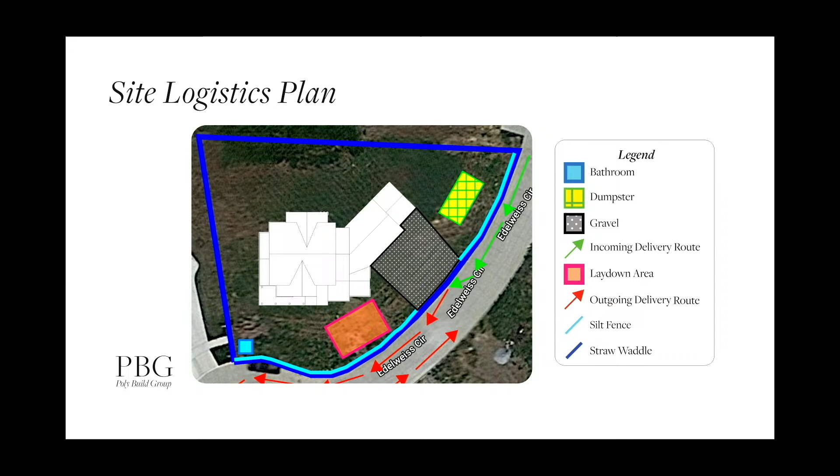Next, I'd like to pass it off to Madison to talk about schedule. Thanks, Brendan. So for this project, we calculated a total duration of 173 working days while keeping in mind holidays and potential weather delays. We built this schedule keeping in mind that the best time to build in Tiffin is after March, when the ground is thawed, so we can start site work and excavation right away.

To talk a little about permitting, Tiffin takes about an average of 5 to 10 days to secure a building permit. Therefore, we felt that 9 was appropriate given the planning and accuracy that went into this home. So our permitting will be complete a month and a half before we break ground, kicking off pre-construction.

We paid special attention to long lead items such as cabinets, lumber, appliances, doors, and windows. We want to do this to make sure that our crews have material on site right when they need it so that they can start on schedule.

Our mobilization kicks off on April 3rd of 2023. Our home will be completely dried in by the time winter rolls around, making sure our interiors are protected. Our rough-in will be done on July 28th of 2023, roughly 4 months after the start of our project. Both our interiors and exteriors will be done by the beginning of November, and following that, final completion on November 29th of 2023. I'm going to pass it off to Leo to talk about the estimate.

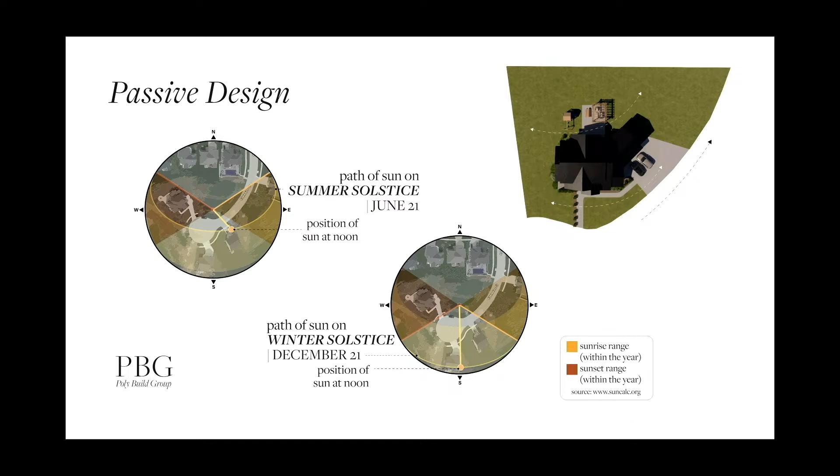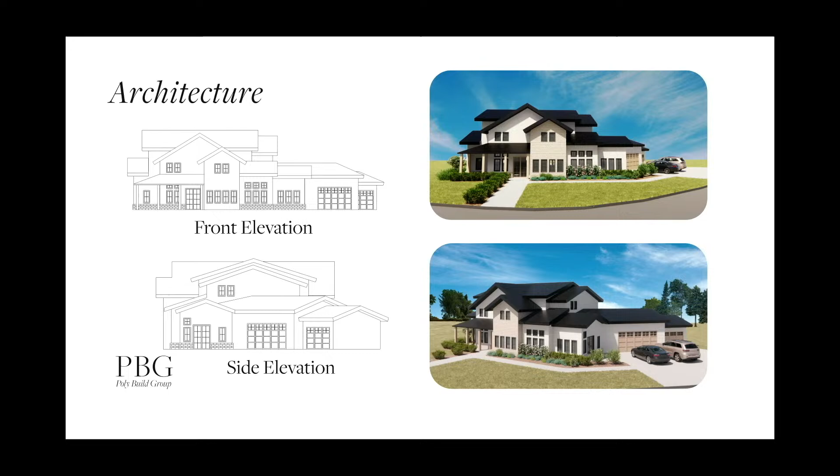Onto our elevation. The front elevation shows the south-facing window, and the side elevation shows the massing orientation I mentioned previously. To the floor plan, the main floor has 2 bedrooms and 1 full bathroom.

Entering in from the front porch, you're greeted into the living room that has double ceiling height before going into the open concept full kitchen. Opposite the kitchen is a flexible dining area and enclosed office space, a sunroom, a laundry room, and a 3-car garage.

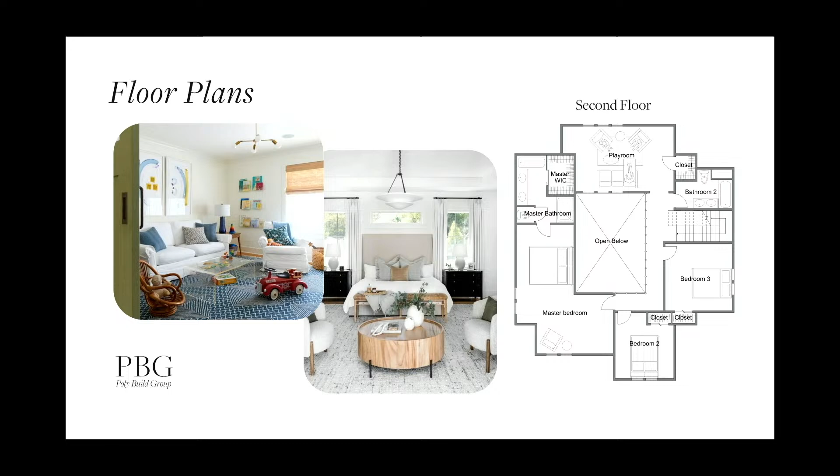Heading up to the second floor, you're greeted into the interior balcony space before going into the playroom. This floor has 3 bedrooms and 2 baths with a master ensuite and a walk-in closet.

Heading down to the basement level, you're greeted into the family room that has an egress window and another full bathroom. This floor has a flexible gym area as well. For more development and growth in the house, there's an unfinished storage space. This concludes the housing tour.

I'm going to pass it on to Russ for the finance overview.

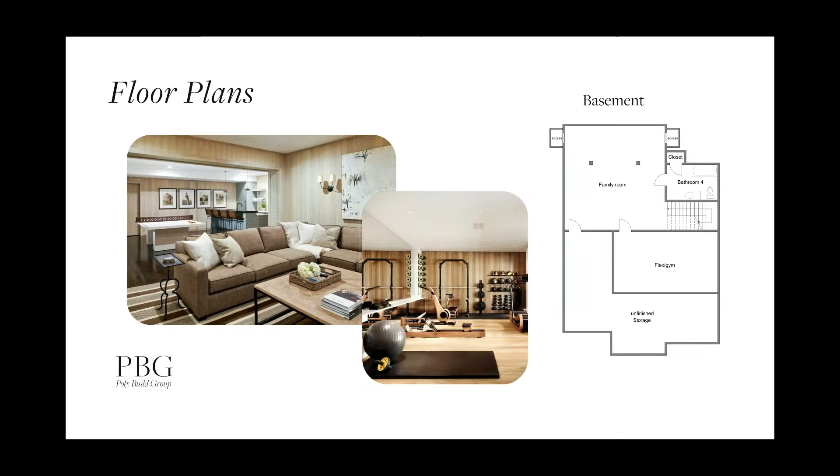Going into our acquisitions and construction costs, we have a lot acquisition of $99,900 and our soft costs, overhead, and hard costs totaling $507,000. Now going into our finance and closing costs, we talked to a few lenders in the area and found 7.5% to be a fair interest rate for this project.

Along with our interest expense of $21,000, we had an endorsement fee, escrow fee, appraisal fee, and loan fee. Going into our finance draw schedule, we started drawing money for this project in February, and this ended in November. Throughout each month, we paid interest on each expense that we had drawn for, and this was paid off at the date of sale.

Going into our sales and marketing costs, we used Redfin as our seller's agent, which gave us a 1.5% commission fee, and we used a buyer's agent commission fee of 2%, which was negotiated down due to current slow market trends and high interest rates.

Going into our sensitivity analysis, I would like to highlight 4 different segments that we kept our eyes on throughout the project, starting off with the sale date adjustment. As we hold on to the project for 1, 2, or 3 months after project completion, this will only affect our profit margin by 0.5% per month.

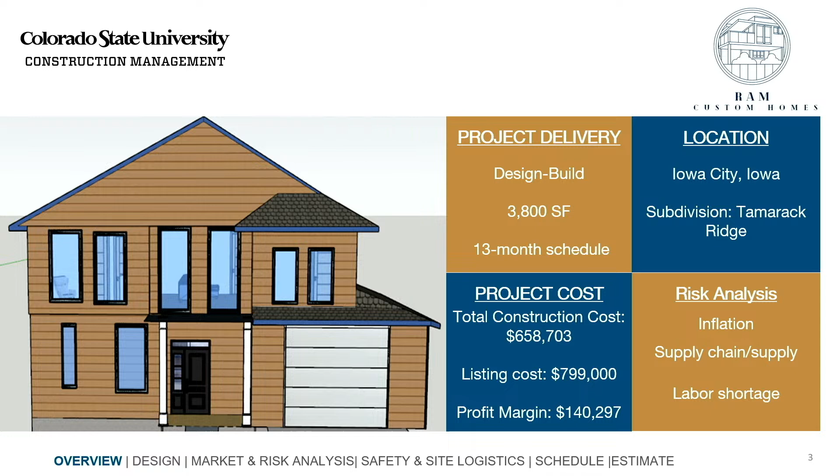We wanted to start with the design since it is a custom home. This is one of the biggest parts of our home. We have indoor-outdoor living in this house, with a bunch of huge windows. We picked a lot that backs up to an open space, so there's a big open space behind the house. You'll never have a neighbor, so you want to be able to have a good view.

We have a 3-panel sliding patio door that accesses the closed-in patio. It's a very modern design, built for growth. If you go in through the front door, you have a full bathroom on the first level as well as an office, and the rest is open space, so you can be with the family or go in the office.

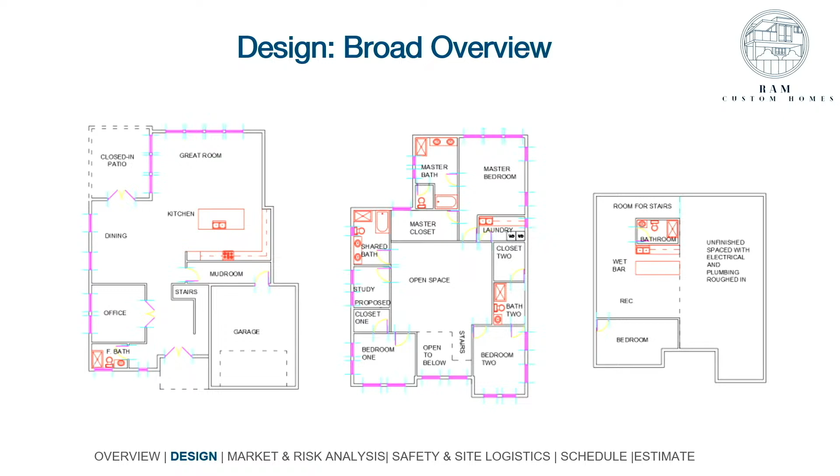If you go upstairs, you've got 3 bedrooms, 3 baths, as well as an additional office upstairs. With COVID being a thing, a lot more people are working from home. This allows 2 different people to be working at home at the same time without interrupting each other.

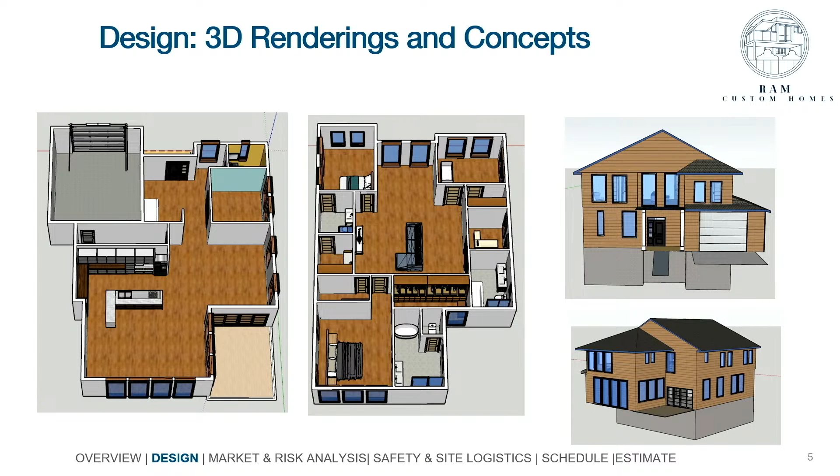As far as sustainability goes, we've got smart features throughout the whole house, smart lights and a smart thermostat, so you can control it while not being home. We also replaced the traditional grass lawn with a clover lawn. It's a lot easier upkeep and better for the environment, and it uses a lot less water too.

Right now we are looking at a seller's market, meaning homes are selling fast and increasing in value. As for competition for our house, most homes selling in Tamarack Ridge and comparable neighborhoods sell from $400,000 to $800,000, while higher value homes sell for a bit more. Our price is around $800,000, giving us availability to sell to a younger market and the ability to provide more custom homes.

We identified our target market as young professionals with high earning who want to expand their family. This population displays the highest amount of desire and ability to become homeowners. Our unique design and suburb location reflects the macro trends that are increasing market values, and the sustainable and unique designs are attracting homeowners from our target market.

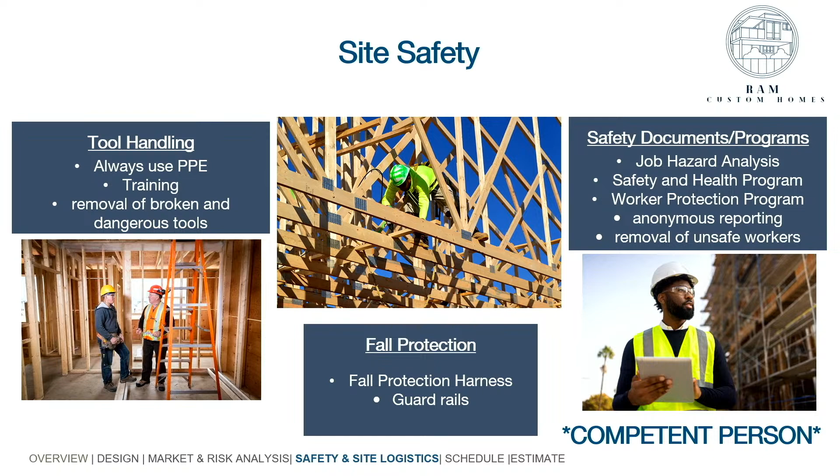One of the biggest risks when it comes to construction is safety. Here at Ram Custom Homes, we want to make our employees' and other workers' safety a priority always. Today we want to emphasize 3 of the main hazard preventions: tool handling, fall protection, and safety documents and programs. We emphasize these because they will be used most of the time during our project. We always want to have a competent person on site to make sure that the project and tasks are being done in a safe and correct manner.

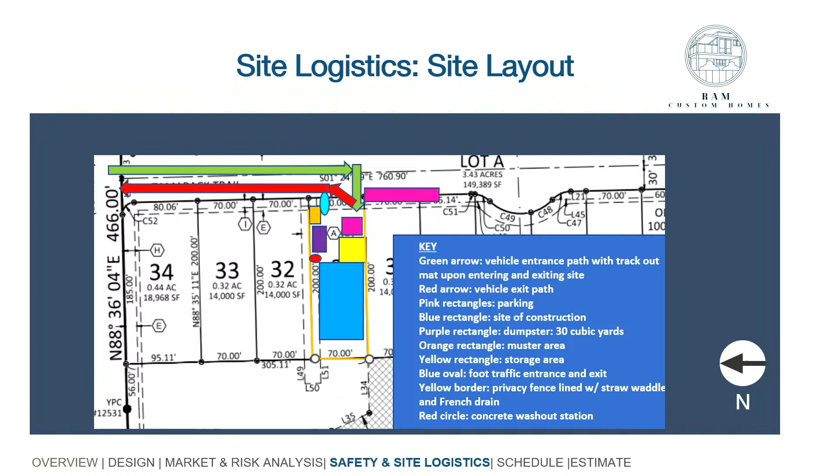With safety in mind, it helps us plan our site logistics. Here we have our road where our entrance and exit would always be. Because of this, we have easy access parking, along with easy access for delivery trucks to our storage area. The storage area will be easy access as well for our construction site, which is this big blue rectangle. We want to point out our linear yellow square and red circle because this will help with our stormwater prevention plan.

The stormwater prevention plan includes a fence with a privacy screen, along with straw wattle, and a French drain. This would help prevent contamination, along with the water management easement that's in the backyard, and a concrete washout for the phase when we have concrete as well.

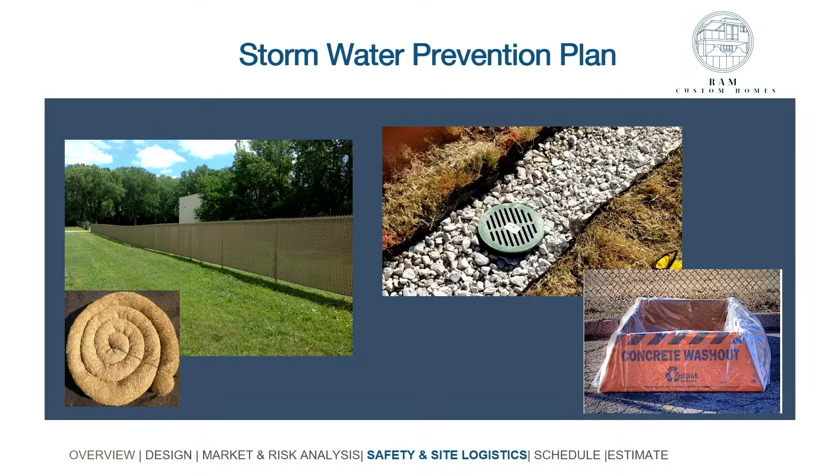As you might have noticed, this seems like a little bit of a longer time frame, and a lot of that is because we're a design-build company. We do have our 3D renderings, but we have not finished our documents, and the big part of that is because this is a custom home. We really want our customer to have their say on their finishes. We want them to feel like this is their home, so the sooner we can get them involved, the better.

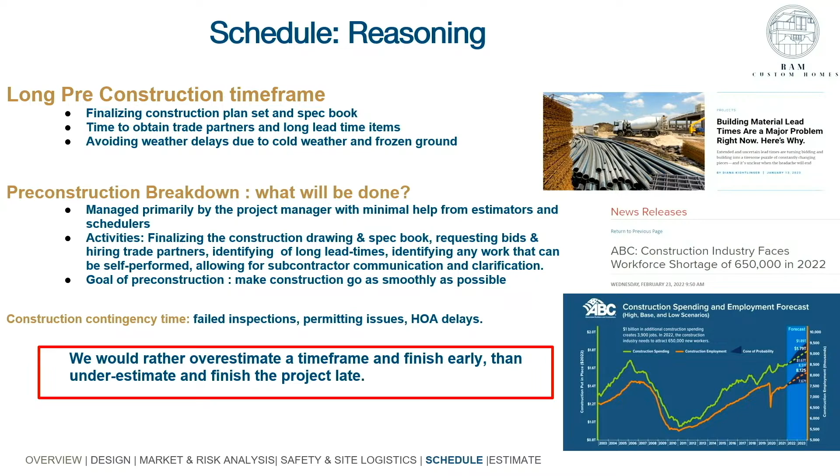So bringing them on during pre-construction allows us to have them communicate with our subcontractors. It allows us to identify long lead times and any special products that they might like. As you guys probably know, we're in a time of very long lead times right now. We're still recovering from COVID, and it's always been a hassle to find labor in construction. So the goal of our pre-construction is really just to make construction go as smoothly as possible. So when looking at our schedule, our entire philosophy is to overestimate a time frame rather than underestimate. We would rather get done early than finish late.

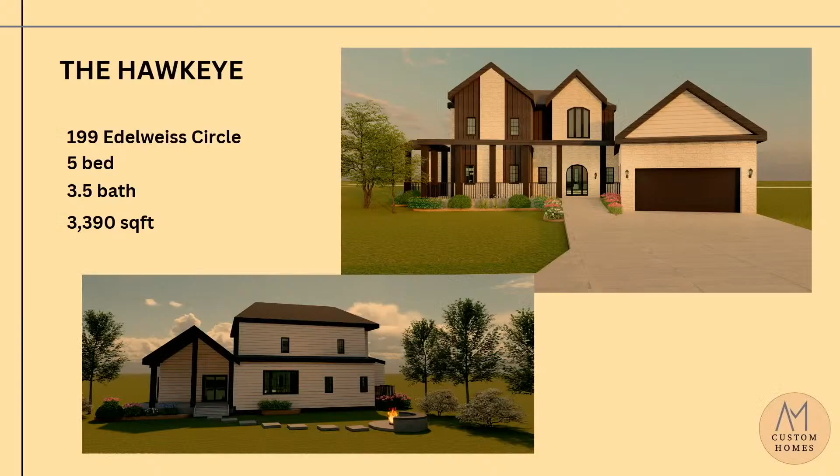Now that you've heard a little bit about where we are and how we're going to sell this home, I'll pass it to Caitlin to show it to you. So welcome to 199 Edelweiss Circle. This 5-bed, 3.5-bath home features adaptable and flexible spaces, as well as an ADA accessible first floor plan.

Getting into the exterior finishes, you will notice vertical and horizontal siding, a limewash facade, as well as a metal roof. We have incorporated a concrete stamped sidewalk and driveway, and a covered porch perfect for your morning coffee. Going around back, you will notice a covered porch on the left, perfect for grilling and dining with your family and friends. We also have a more private deck off of the primary suite.

This backyard is customizable for every family, whether that means including a playset, a fire pit, or a soccer net for the children.

Getting into the floor plans, on the first floor, walking through the front door, you are greeted with open living and dining spaces. Throughout the house, we have LVT flooring in the main spaces, and in the laundry, mudroom, and bathrooms, we have tile. This house is perfect for growing families.

For the bedrooms on this floor, the one up top is perfect for a bedroom, or it can be converted into a private office, and the primary suite is on this floor as well.

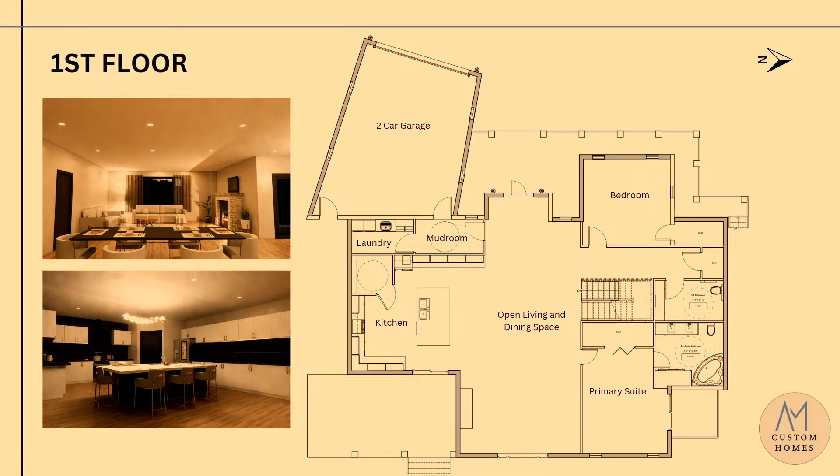Now that we've seen the plans, let's take a look at the construction.

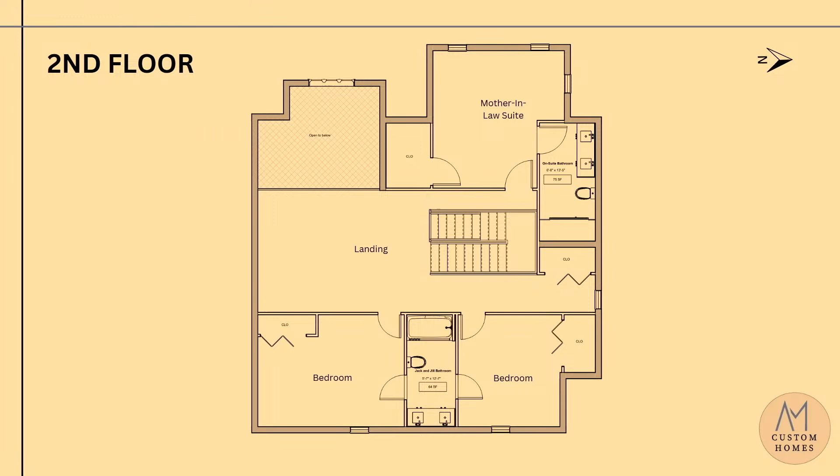Like any of our projects, sustainability is at the forefront of our project. For example, our design, material consideration, landscape, appliances, as well as our trade partners. We work closely with Iowa City and Cedar Rapids to select subcontractors with sustainability plans in effect today.

As the project manager, I work closely with the creation of the schedule, and some considerations to be aware of would be the long lead time on certain materials, the inspection dates, as well as the weather delays that we've already implemented into our schedule.

Some milestones and dates to look forward to would be our first day of the project starting on February 20th, our rough and enclosure fully finished by September 8th, and our certificate of occupancy being delivered by November 14th, all in all taking under 9 months.

With that, I'll hand it off to Diego to talk about our site management plan.

Thank you, Anthony. As superintendent for the AM Custom Homes team, I'll act as the midpoint between the design team and our trade partners. In order to achieve quality custom homes, we need to set the bar with our trade contractors, and we do that by supplying them with key documents such as a design book and a site plan with safety elements, and a builder inspection sheet, which they will perform at the end of their work to ensure that they have reached our standards before we issue their final payment.

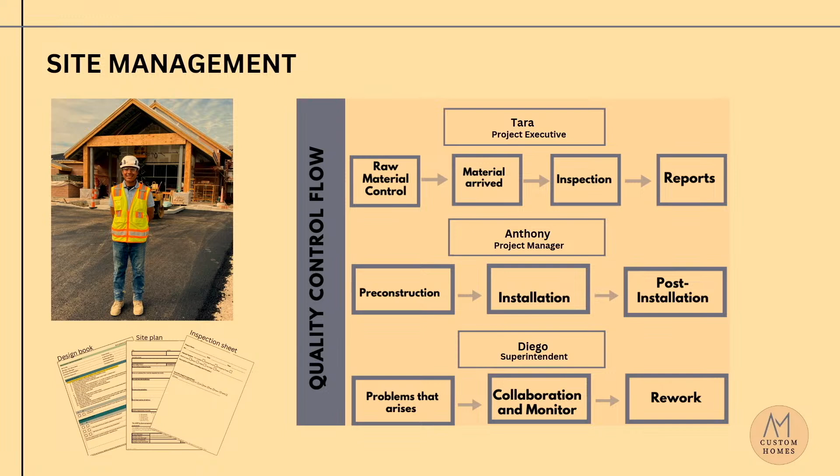A site consideration for this particular lot was that we were already in an established community. This made us focus on our site layout plan to be mindful of our neighbors and community.

The foreman will receive these key documents to ensure the quality of their work and also their safety. A key element of the safety logistics plan is the gravel driveway, which will act as an off-street trade parking lot and also a delivery point. I will now pass it on to Vicki to talk about the estimate.

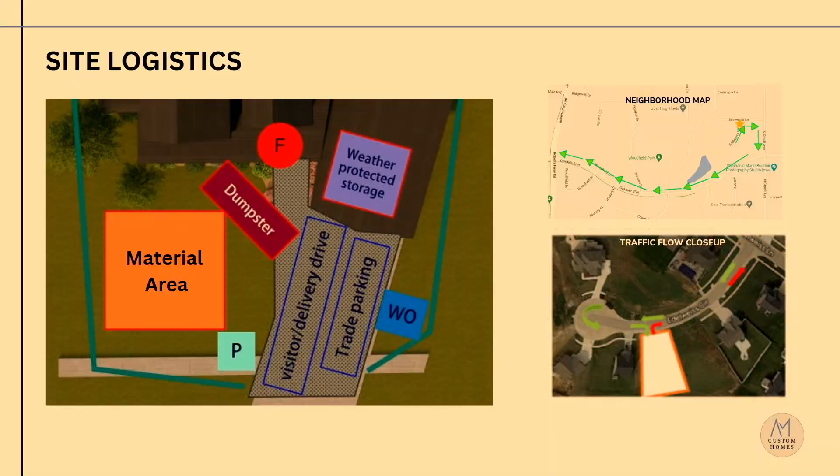Looking at the estimate, we come in at just under $700,000 total cost. The purchase price of our land was $99,900, with construction costs coming in at $550,000. Sitting at 3,390 square feet, the Hawkeye comes in at about $206 per square foot.

Contingency will be about 10% of our construction costs. We will use this money to cover material delays or substitutions, and also to mitigate any sort of labor shortages or delay in finding other companies. We also have a Conex box that will be on site over the duration of the build that will supply additional storage area.

Looking at the direct cost, about a quarter of our finishes and interior design work will aim towards a higher end finish. We are looking at higher end countertops, tile work, appliances, and hardware, in hopes of finding that higher echelon of customer to maximize our profit. I will pass it on to Tara, and she will tell you about our financial opportunities.

Thank you, Vicki. We are displaying 3 scenarios of home sale potential possibilities. We'd like to start off with our optimistic scenario that is reflecting the positive home sales of other custom homes in the neighborhood. We aim to make 20% profit. We also show a conservative profit where we could possibly make a percentage of 15%. We'd like to display our base scenario to provide transparency with our investors of potential risk, and that is where we deem it could be 10% profit.